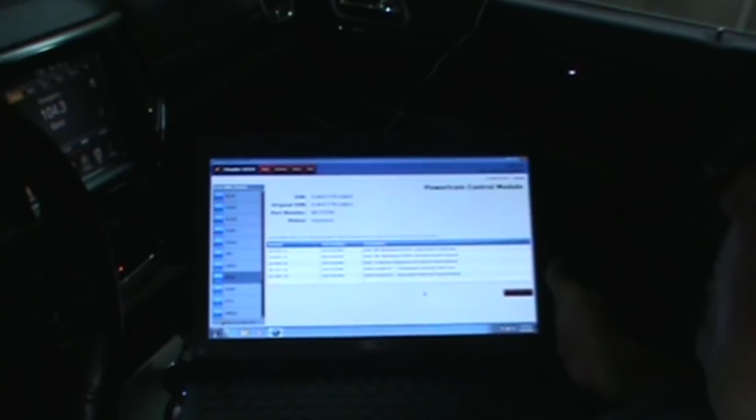Alright, so we didn't bring anybody along for the software install because that would have taken like 4 hours. Between the Java applet and the drivers and trying to find the J2534 software, which is deeply buried in a document, I went and installed the wrong software. It is what it is. I inadvertently installed the Tech Tools, which is not the tool we should be using. And ironically, I think if I had to find the software again, it may take me a minute. But we went into, let's see if the topology actually wakes back up again.

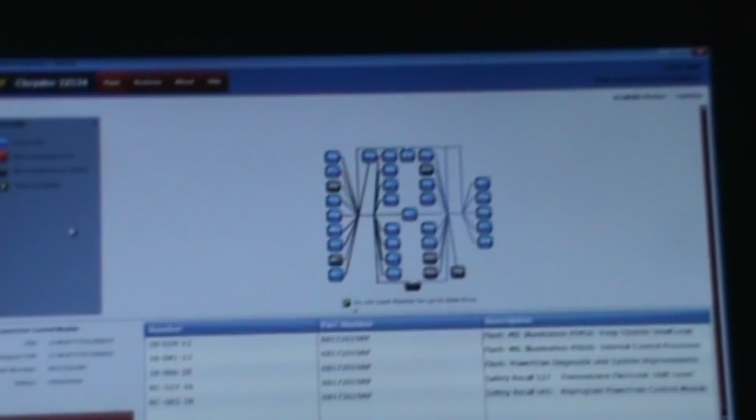No, it's not there. What's going on with my car? I was just going to go to bed and I look outside and I say, my car's not there. No, but we're doing a video on your car. Oh, you're doing a video on it? Yeah. Am I interrupting? Well no, you're in it now. Not like this. Alright, just leave the keys in the mailbox. Poor man's in his skivvies. Yeah. Just give the key to Maria. Alright. I'll see you later.

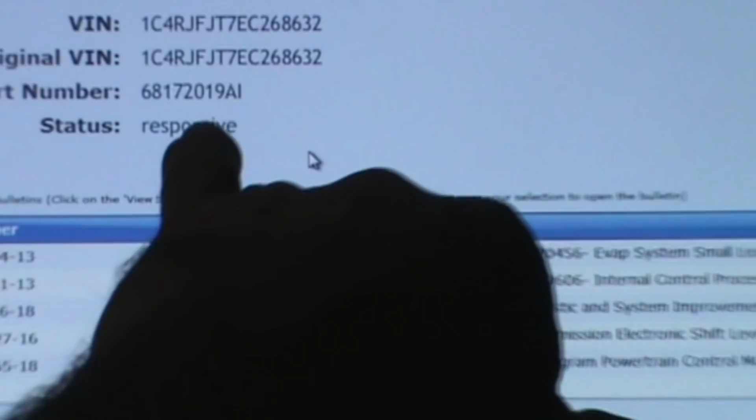Ironically, if we back out of topology, we just go to available flashes, we go into the PCM, it is listed, this is the one we want. The old number was AI, the new one's going to be AP, and that's our fix for the evap leak. And it inadvertently will fix a whole bunch of other issues. Looks like it'll even take care of recalls. I saw 2 recalls on there. We shut the radio off. We're going to shut the AC off. We shut the interior lights. We latched the door.

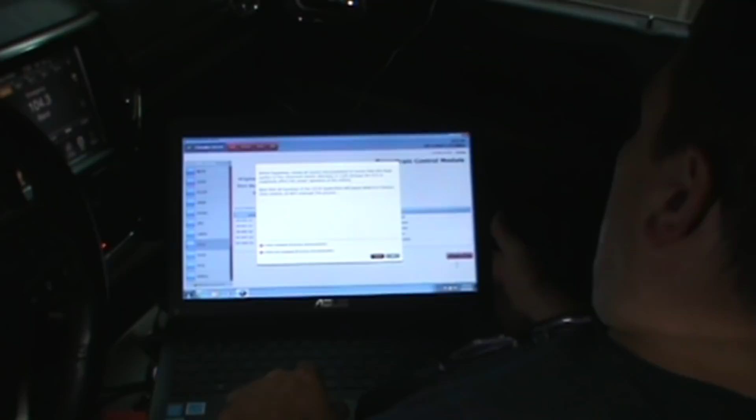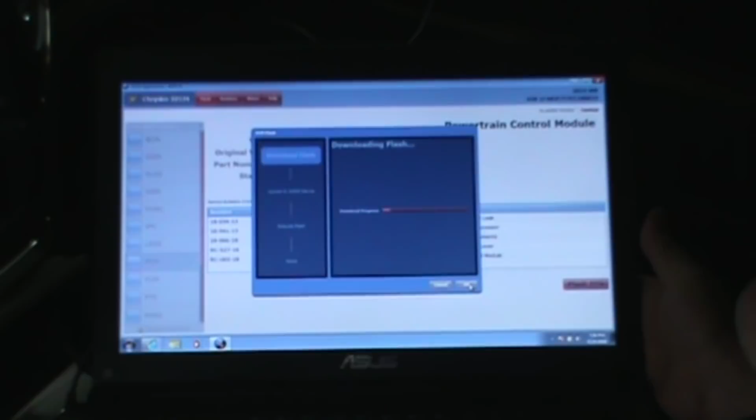I have reviewed. Yes, sure. You saw me. I read it all. You're a witness. I read everything. The whole thing. Now we hurry up and wait. That's it. This is where we do the speed through. It's interesting to me because it's such a different interface than what I'm used to. This is what us mere mortals have to go through.

Hey. Love you, man. I hope everybody's figured out who's behind the camera by now. Yeah, just some guy from New Level. Never heard of him before. I won't mention his name, Keith. I'm never too old to be the student. School's in session at 8 o'clock at night.

Just a quick footnote, and on that note, if somebody's willing to teach, don't be stupid, take it. Be humble. And if you have something to offer, offer it. Don't be stupid. That's right. I think Keith and I had a little discussion today about that. Yes, we did. And we may have a further conversation and include everybody in on it. Absolutely. There seems to be an industry-wide problem.

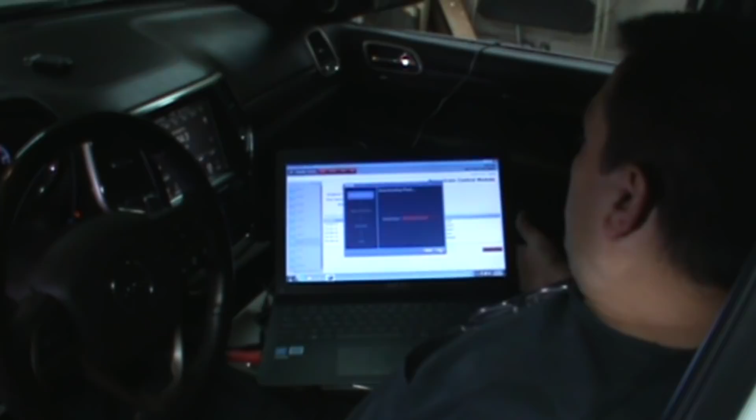Let's see how far we're progressing here.

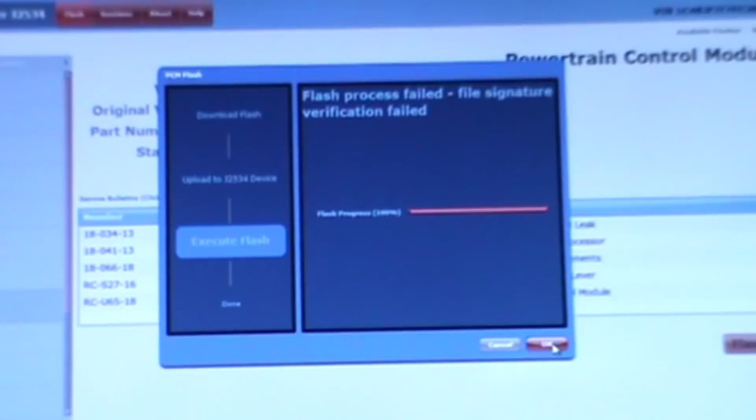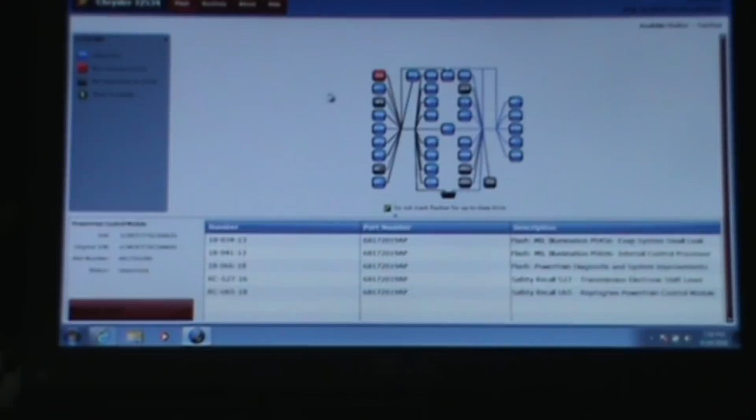Flash process failed. File signature verification failed. That's interesting. Okay. Go back out to your topology for a moment. Make sure that you can still communicate with the PCM and that didn't go red on you. ABS went red. Okay, let's go back into PCM. Verify that it still talks. Yeah, everybody's red. Everybody just went red. That's interesting.

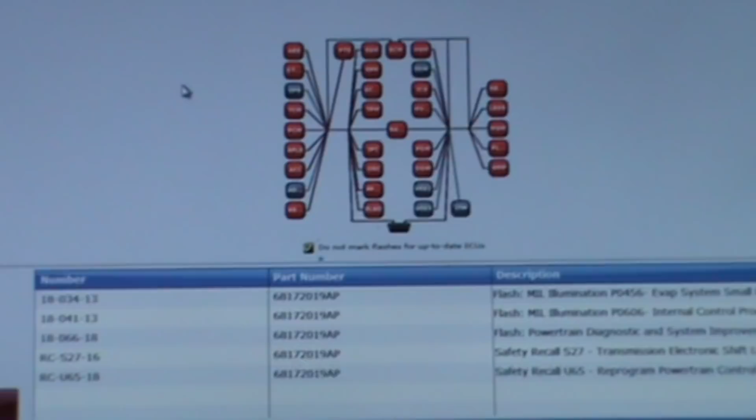Alright. Whatever you do though, we're not going to cycle the key off. No matter what anything on the screen tells you, that's the one rule. We never cycle the key. Should we restart the software? You can actually try going back out there and looking at, let's see, what do you have there? Up on the top. Routines. Go ahead, go into routines, and go into your PCM, and hit check PCM VIN. And let's see if it'll actually run that routine and speak to it.

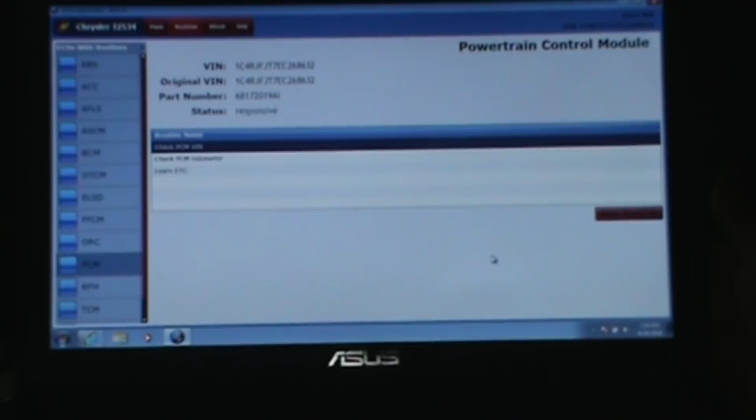Even though we see the VIN up there, we see a no response down here at the bottom. Okay. Alright, so this is the scary part. Because if it's not responding to that, then the question is, is it the tool, or is it that it stopped mid-programming and may have erased data and not put it back in? So we're going to unplug this scan tool for a second here. Should I restart the software? Plug it back in. Restart your software.

Excuse me. There you are. So that's part of the reason there. It looks like it may have dropped for a moment. I think our internet connection dropped. Yep. So possibly we want to tether this differently. Okay, so what we'll do is we're going to tether this over to mine. Just give us a minute. We'll be right back. Okay, let's start recording again, and we are going back in to give it a try on a different Wi-Fi.

Auto Intelligent Inc. Never heard of them. I thought we were using an Autel. Here come the jokes. Well, you know. I know.

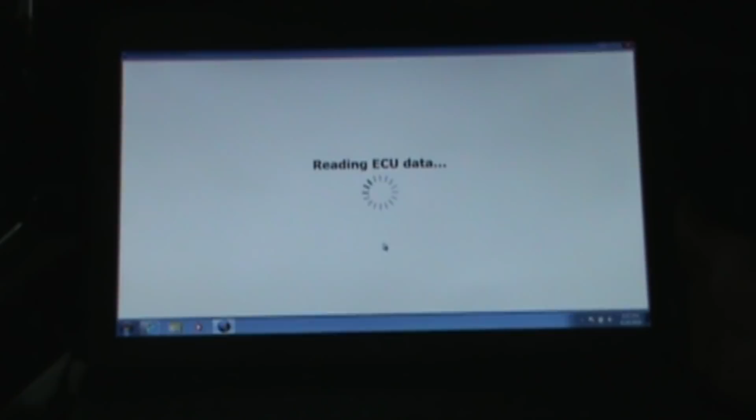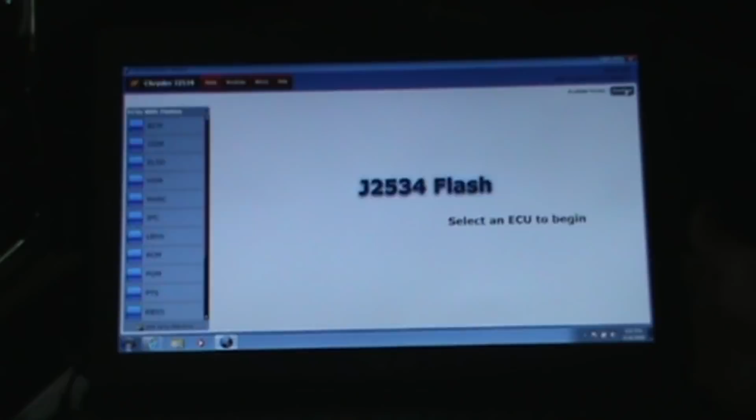I think that may also be why the topology stopped showing it. Okay, keep going, keep going. It's coming. That's a good sign. That's a very good sign. This PCM is showing there, so let's go back to the topology. Yeah. There we go. Now we're in, and we see little green lightning bolts everywhere. Right. But we're just going to work on the one that it's called for, because we don't want to create a problem. That's right. Click on the PCM. There you go. Let's try this again.

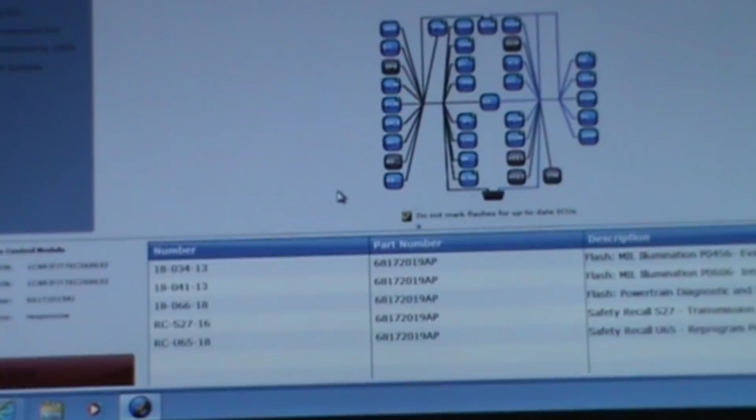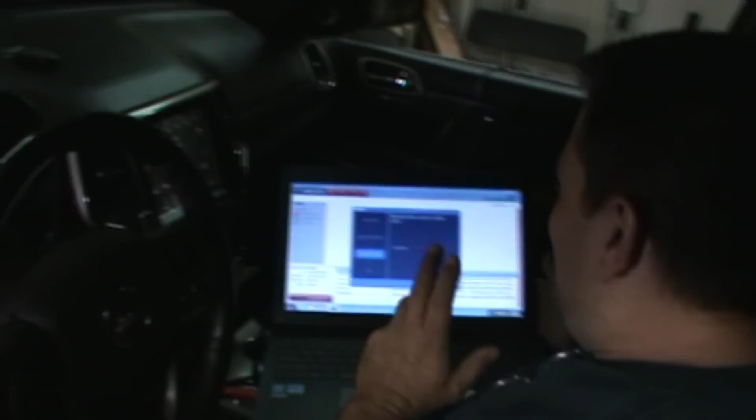I'm going to zoom that back a little bit. Yes, I read it. I read it again, just in case I missed anything. You know the part where it said make sure you have a stable internet connection? Hey, look how fast that downloaded. Amazing. There you go. That's what I was expecting to hear before, that fuel pump cycle. Starting Chrysler Flash, there's our ding.

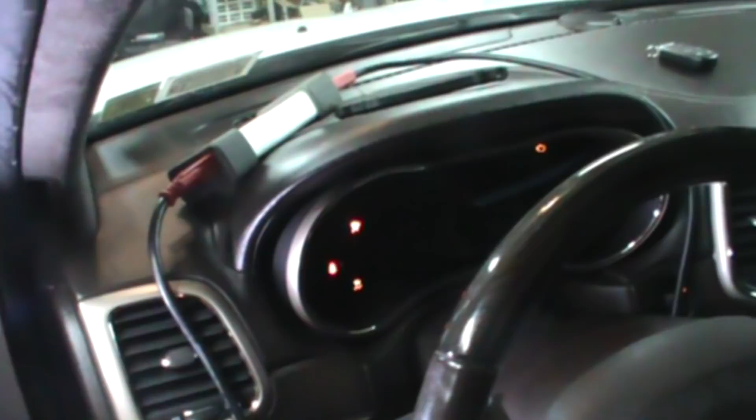Now sometimes when you're doing that, you look up there on the dash, everything will go black. Don't be scared, that's normal. They're just going into a mode where they want to turn off all the other accessories that are unnecessary for the moment. They want to eliminate those so there's no communication happening on that line other than what they're commanding. And the progress bar is moving, which is a great sign. And that is exactly why you do not cycle the key, because a lot of them can be recovered as long as you don't cycle the key.

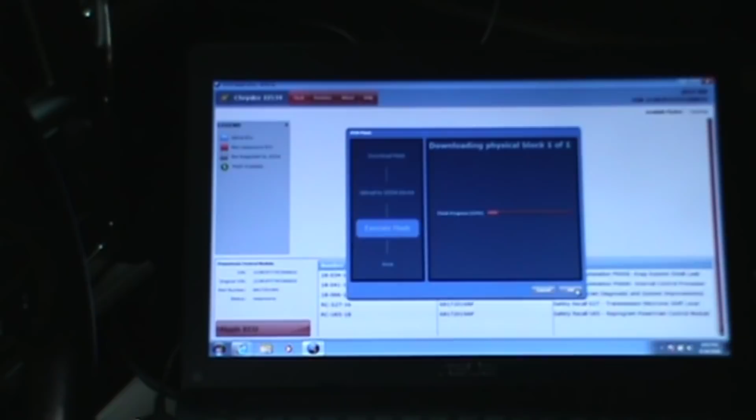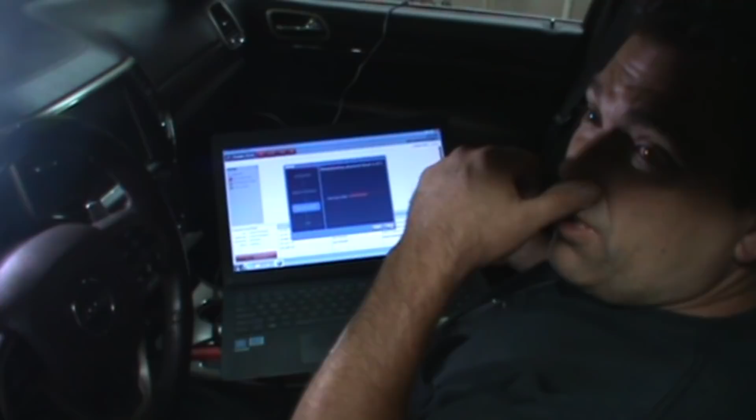Another hurdle when you go to activate your subscription. Right? I only have Internet Explorer on here, which is horrible. The only thing Internet Explorer is good for is downloading other browsers. But a lot of the other browsers don't work well with automotive software. So this is strictly my shop PC. I don't even have antivirus on here. I have nothing on here. I think Sam over at Tool Hut actually has a nice video on setting up a laptop, what to shut off, what to turn on. Yes, he does.

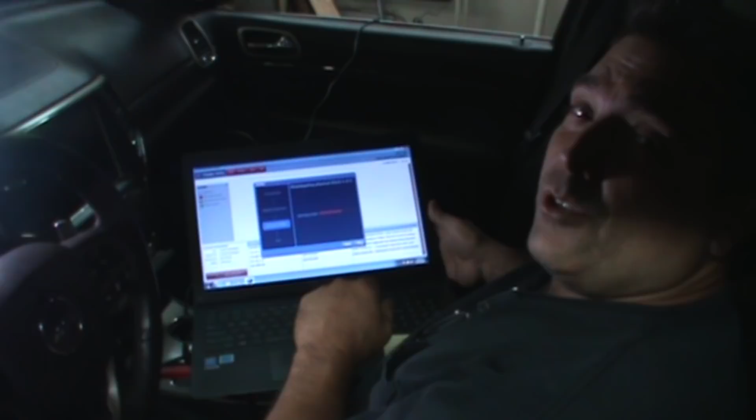The snafu was Internet Explorer. I go to Tech Authority, I go to activate my subscription, and it keeps coming up with an invalid security certificate. So I literally had to go to another machine, activate my subscription, come back in here, and then log in. And then of course it asks you for a token because it thinks you're hacking in from a different location. So then I had to go get a token emailed, copy it down, bring it back in here. So don't be surprised when you run into that. Yep.

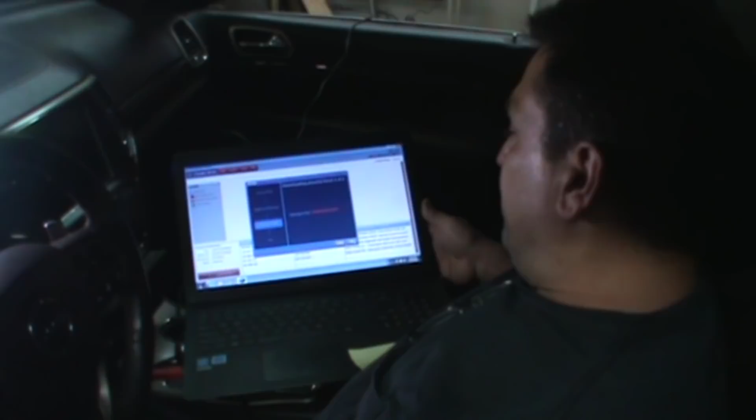Even with the wiTECH subscription, we still have to deal with the tokens. That was the first thing you asked me before. Is it a token issue? I didn't even get that far. I couldn't even pay for the subscription. The alternative is to get it through AE Tools and let them handle it. That's right. I'm not there yet. I'm getting there. Soon.

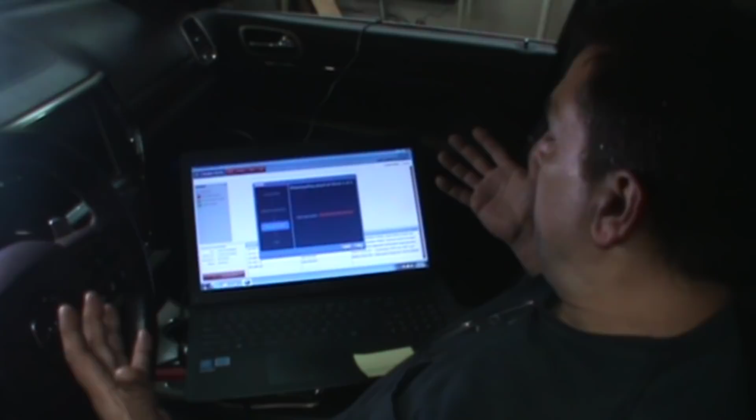Is this not the most boring process that you have to go through? Right. It's clean. It's clean work. It is clean work. It also gives you time to think about all those other cars, though, that you have waiting out there that need to get done. And it's definitely not too physical, which is good because, you know, I'm old and broken. But as you see, there's lots of hitches along the way. Not everything goes as predicted.

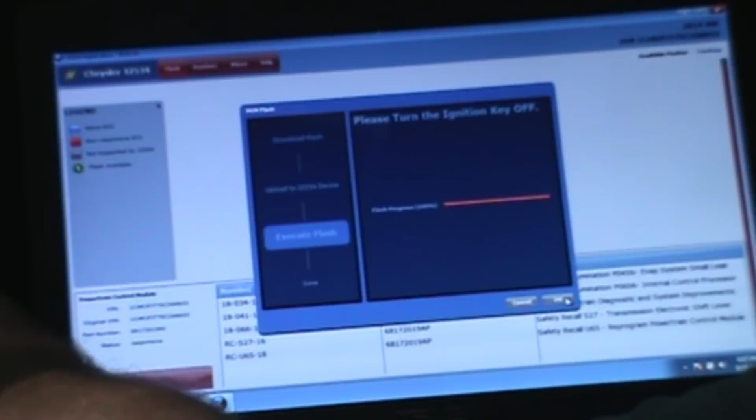Alright, so you got to turn your ignition key off. Now we can turn it off. And hit OK, and then it'll tell you when to turn it back on. I'll zoom in a little bit here on the screen. I'll shut the music off. I know my hearing's going, but there you go. I knew I heard music. And you have to hit OK. Flash process is successful. Done. Hit OK.

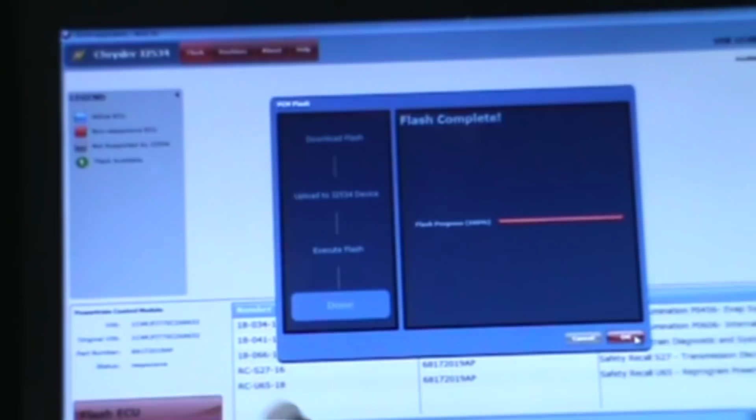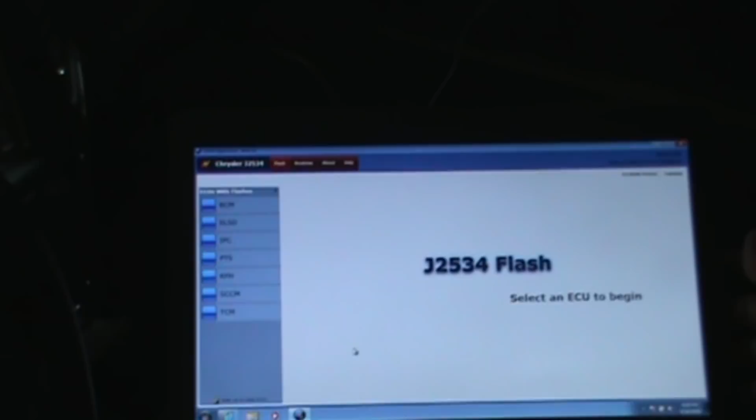Now, here's my suggestion to you. Go out of topology. Go back into your available flashes, up there on the top right hand corner. Top right. There you go. Available flashes. Let it sit there and populate again one more time just to see how many have gone away. And you see that TCM one over there? If you took note of what we had there when we were looking at the PCM, there was mention in there about transmission updates as well. But notice that the TCM is still there for a flash update.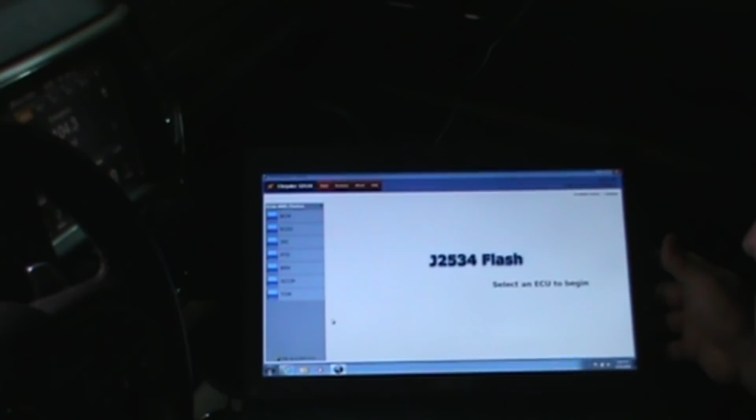Now, on wiTECH it would actually tell me, hey, bring this software up. J2534 is not doing that for you. So click on your TCM because you have those to finish. You're not just doing one module on this car, you're doing more than one. Now, is it recommended to do them all? Anytime you have things that go together like PCM and TCM, you're going to do those two together. In this case here it's an ECM, engine control module, not a powertrain control module. So your ECM and TCM, you always want to have those at the same software level.

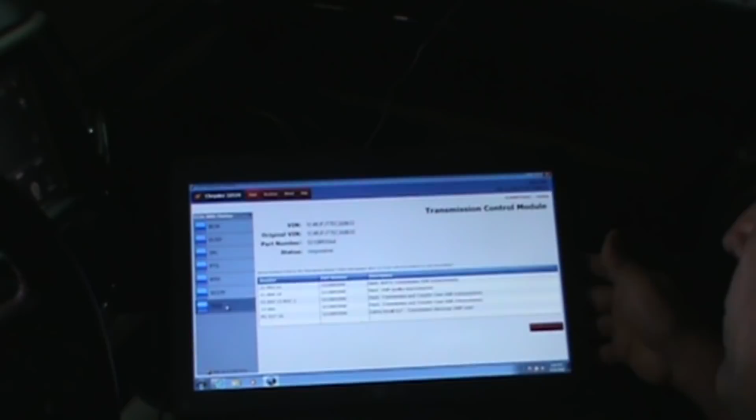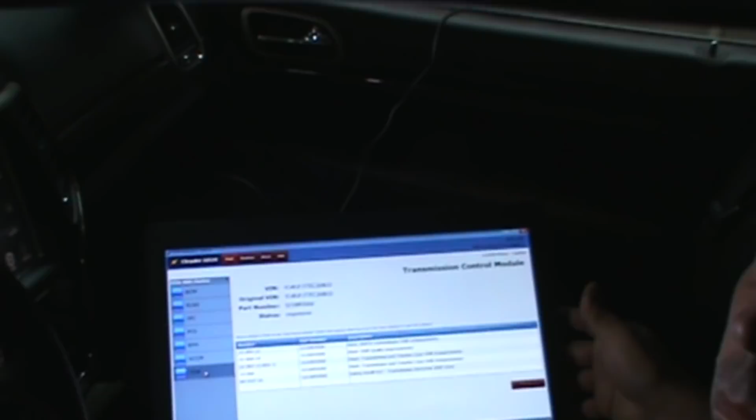If it was something like body control module and our cabin compartment node or our cluster for that matter, if they had a bulletin that was relative to one another. So you always read through what they're going to give you there, because if the BCM said, hey, we made improvements to instrument cluster updates, you're going to do two modules. Always look to see what they're actually doing to the best of what they give you, because they don't always tell you everything. But that way you know for sure that when you're done, everything is brought up to the software level to match the other module.

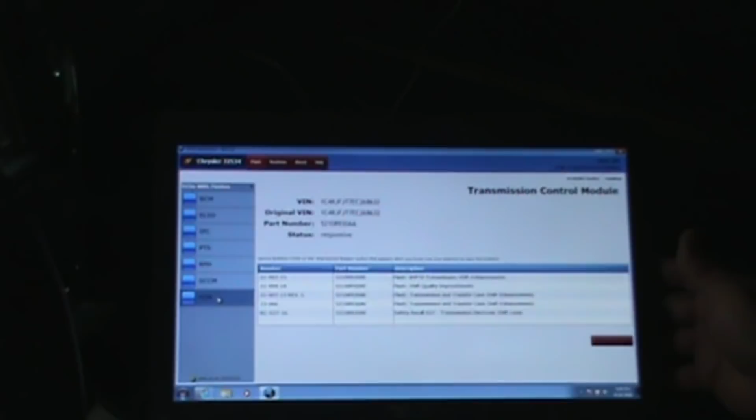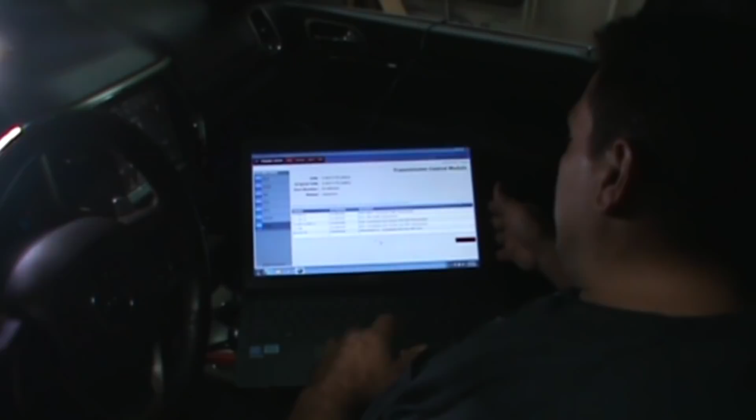Now, on the flip side, if you weren't here right now, I wouldn't know this. What are the consequences? You could end up with shifting issues, late shifting, things like that, depending upon what they're actually trying to accomplish. When we look at this here, we have a recall in there for transmission electric shift lever. If it went to the dealership, they would say, oh, somebody did half the recall but not the full recall, and that would come back on you as something they may not appreciate. And here's the funny part: this truck was at the dealer 2 months ago, and they said, no, there's no updates, everything's good. I sent this truck to the dealer for another issue, and they told me there's no updates. Yeah. But luckily the camera's pointed the other way, so you don't see my surprised face.

All right, here we go again. Yep. Did you read it this time? I did. All right. For those that don't know, he paused the camera and I read everything, and then he started recording again. And I'm a speed reader. And we're really, really good at video editing. One of these days I will edit a video. It's all the free time I have.

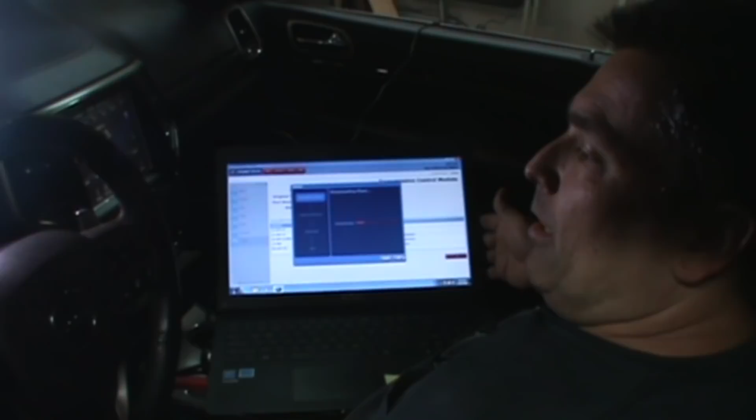So what other cars did you have cooking today? Transmission issue on that old Dodge van, service on a Volvo, air conditioning van for full service. That was it so far. That's still good work.

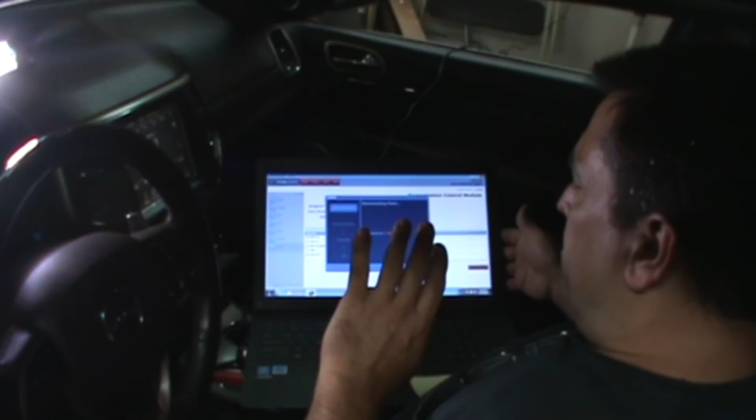Not everything can be this mundane. And this was one of those I specifically pushed to the end so I wouldn't be interrupted. The day's over and I could do this with limited interruptions. Smart idea. I actually tried to do this at least two other times and quit. I said, I'm not even going to get started. You always get a phone call, someone will stop by. As we were sitting here, the phone was ringing. I think I muted it. It's over here somewhere. Yep. I'm sure not quite as busy as your phone, but...

Pause this and come back when it gets closer. Alright, what do we got there? We got lights, dashes going out, radio went out, things coming back on. Things are happening. It's like a holiday celebration.

I'm being very careful. Name that movie reference in the comments.

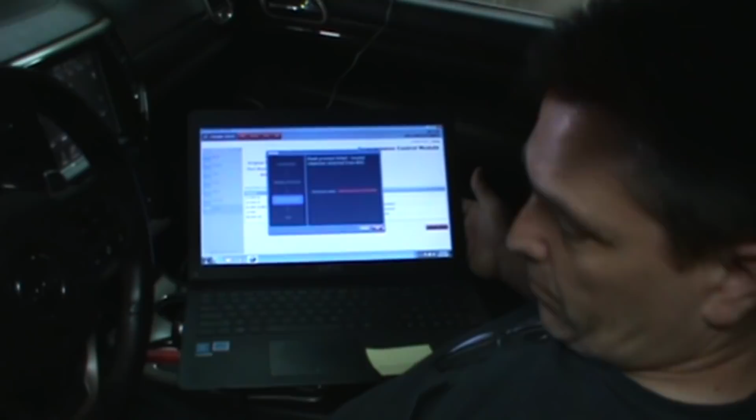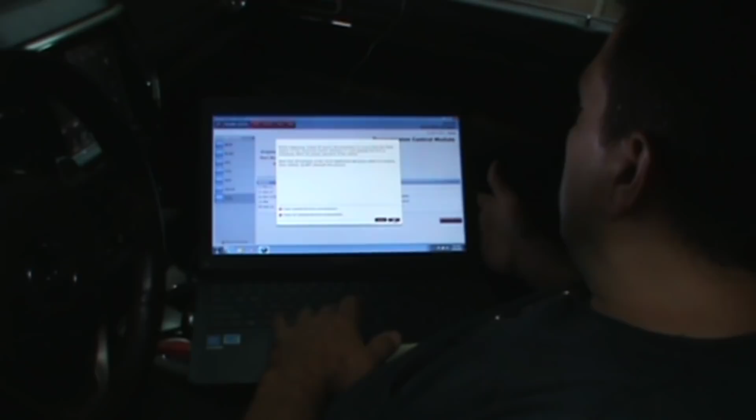Again, I have read all of the documentation. Which is why there were no failures. Starting flash engine, please wait. Excuse me. What's on this? There's much on there.

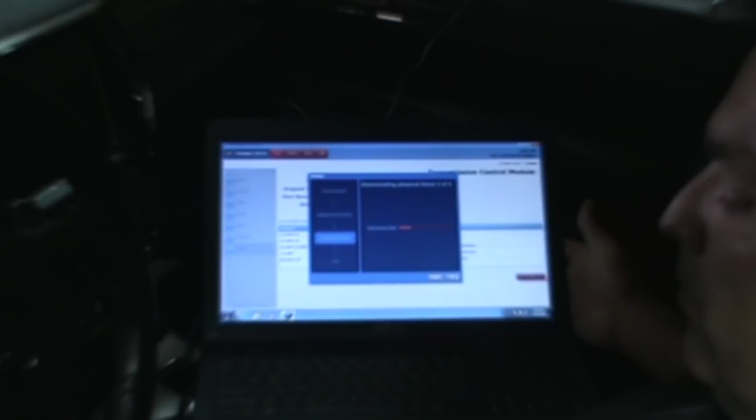You got my good angle, right? It doesn't make me look fat. No, not at all. No, yeah, I think you're okay. Fat. Hold on, right? Is that better? Yeah, that's it. Flex it. Wait, hold on. Wait. So macho. Yeah. That's it. Hey, come on now. This isn't a Danner video. That's right, Paul. I said it. Oh, no. We have a love-hate relationship. He hates to love me.

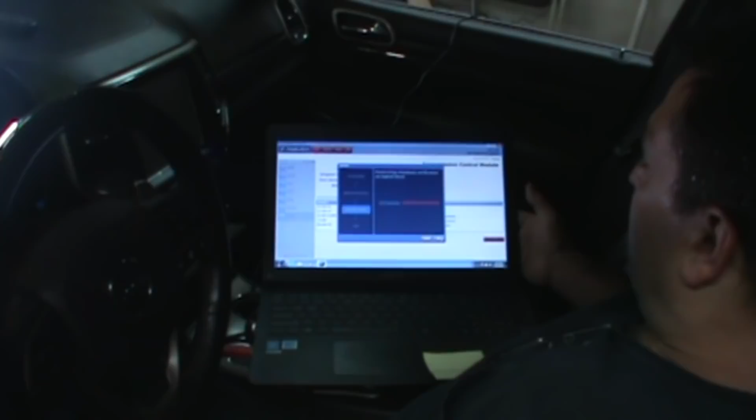Come on now. Get in there. It's like watching grass grow. It really is. And you literally can't do anything else. Nope. You can't walk away. Nope. Because if it tells you to press a button, you have to be there to press that button. And if you wait too long, that's not a good thing. Look at that. Flash process successful. I blame Autel. Hit OK. Eric, I know you got my back on this. I'm sorry. Actually, this is auto-intelligent. That was my mistake. All right.

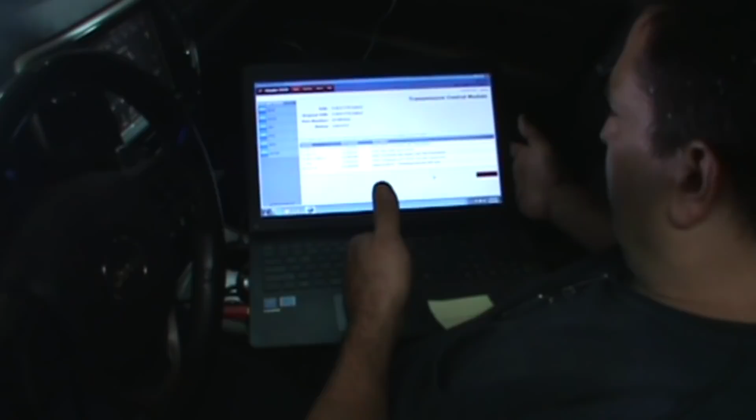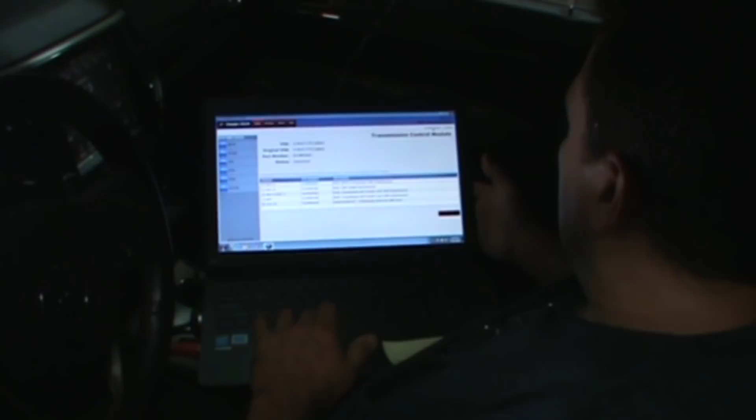So now you got your original VIN back in there. Remember what I said before. Same thing. Go right up here to your topology or go up to your available flashes. And funny, oh wait, that's your newest part number. The AE now. It's already been updated. And that's for the transmission. I was expecting to see the AP. Nope. So let's go back to available flashes. Yep. Which you're already in. So go to topology and then click back into available flashes so it re-updates. Yeah, no worries. Go back into available flashes. Okay, so TCM's no longer there.

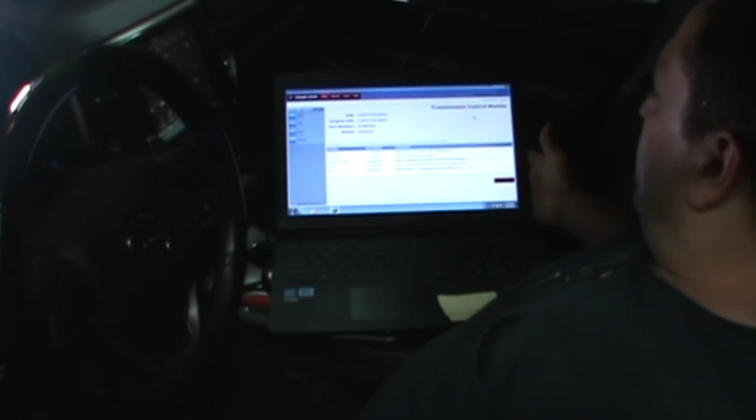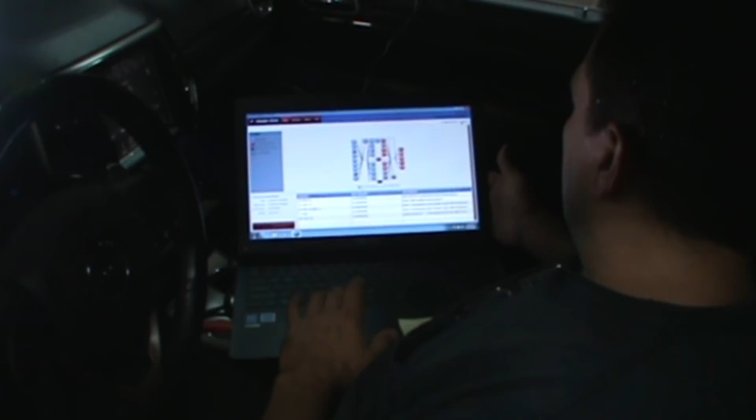Now you can cycle your key off. And wait about, let's say, 15 seconds or so. And then you cycle your key back on. And now when you go back into the topology, everybody should be green again. Theoretically, if everything was good. What do we got going on there? What does that say? Radio in the center? Hover above that center one right there. Radio. Which we know is actually active.

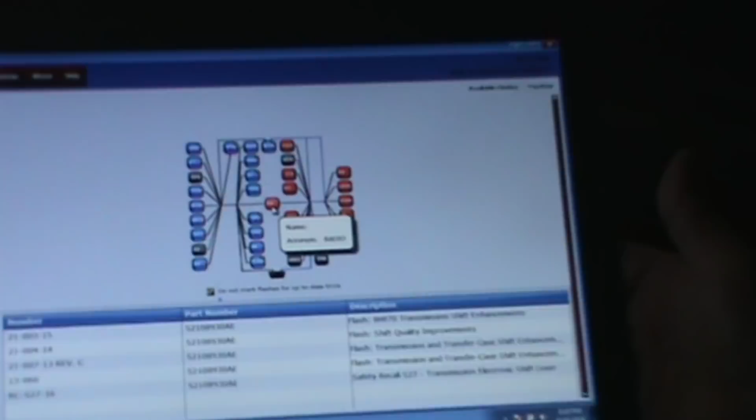Alright, close out of your 2534 for a moment. Go back in there again. Aha. You dropped that on my Wi-Fi, I believe. Luckily, I think we dropped out of it after the flash. Yes, we did.

If it continues to drop, make sure your Wi-Fi is not set up to go into battery saving mode or anything like that. Some wireless cards will do that, and that'll kill you. Also, if you can, stay plugged in.

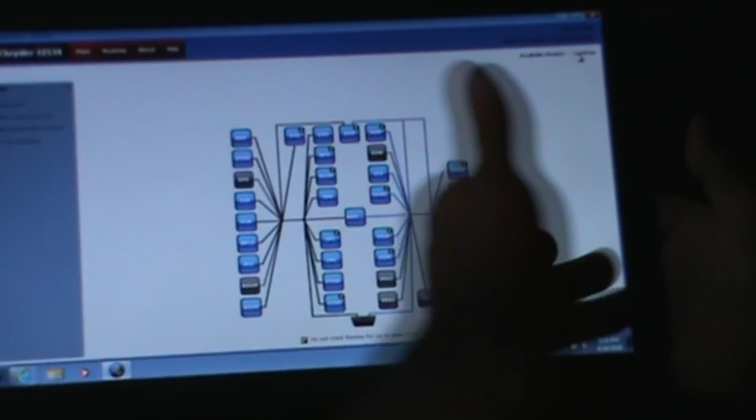Here comes all those modules. Looks like a fully populated list again. Go back into topology, and like magic, everybody's back. PCM and TCM, I'll zoom that in. No more little green lightning bolts. There are other modules there that have updates.

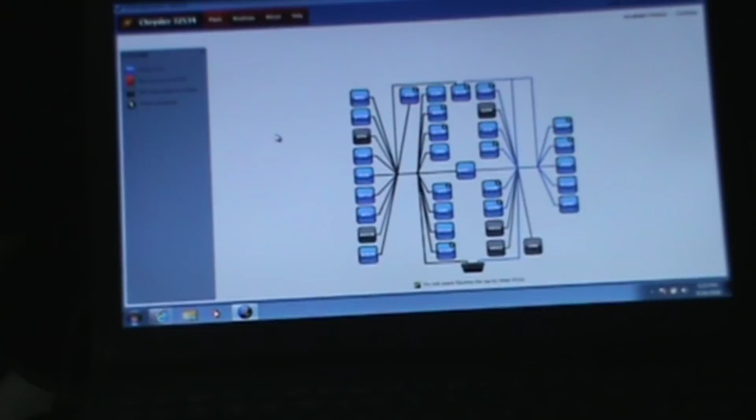You only touch those updates if they make sense, or if it's relative to a problem you're actually trying to solve. So I always just give them a once over most of the time. I'll go around each one of the modules there. If it has anything to do with ECM, TCM, that's what I'll do. But I can tell you now, from doing so many of these, you have nothing else there. It's just ECM and TCM on this one.

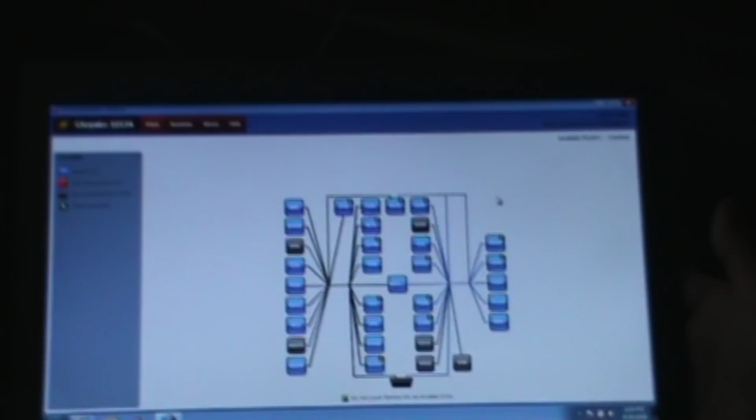That's it? That's it, bud. Hey, look at that, it even starts. Now we gotta clear the check engine light.

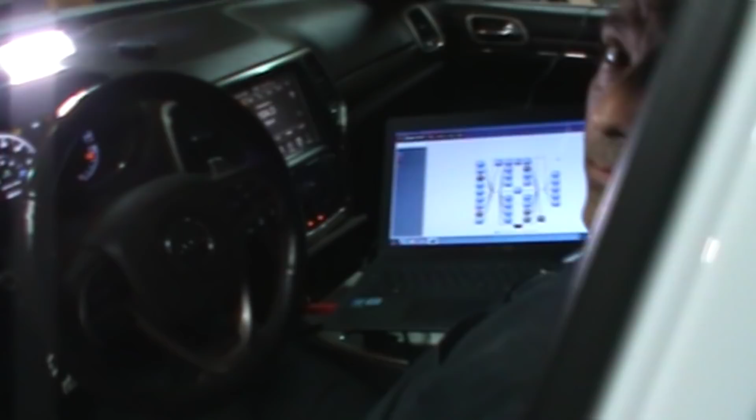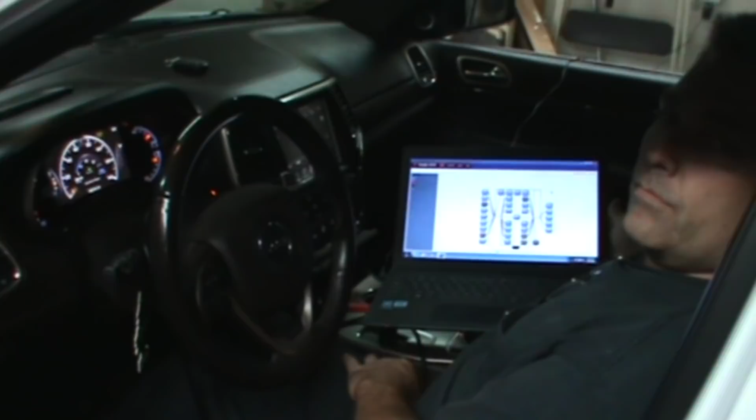Actually, you don't. You should not have to clear the check engine light. If you have a check engine light on, which you might have here, if I get that light out of the way, the next part of this is sometimes you end up having to learn the electronic throttle control. So you may have a code for that, because when you did the ECM programming, you actually got rid of any codes that would have been there. You wiped it clean and gave it a fresh new copy. Sometimes you'll have to learn the electronic throttle control.

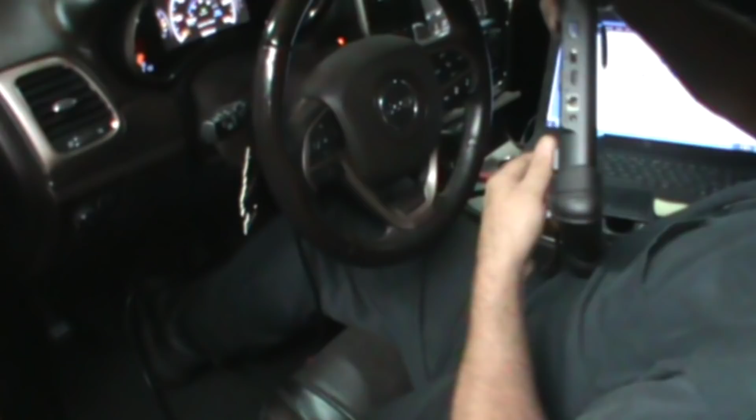You have any hand sanitizer? No. I say it jokingly, of course. A tool is a tool.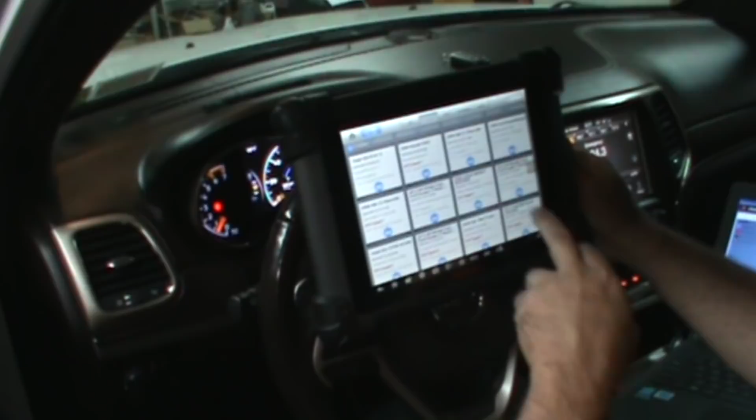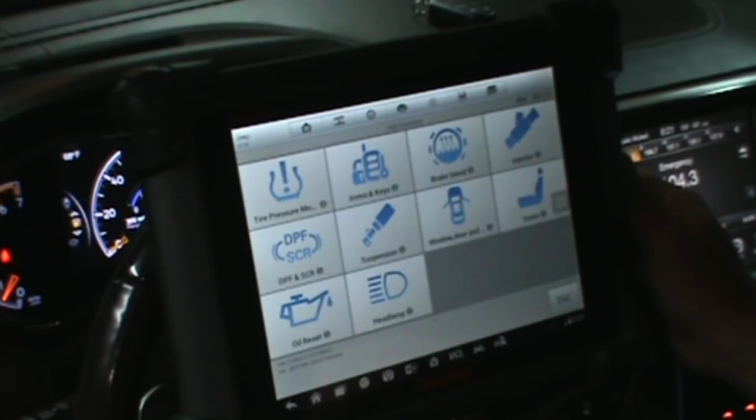It may still have that PO. No, it shouldn't have the P0456. No, it shouldn't.

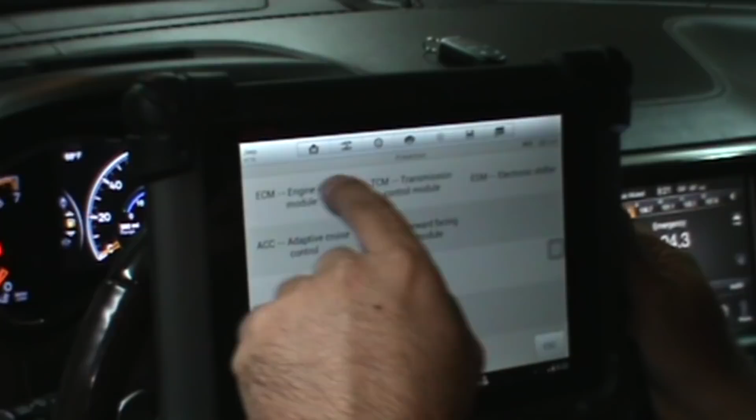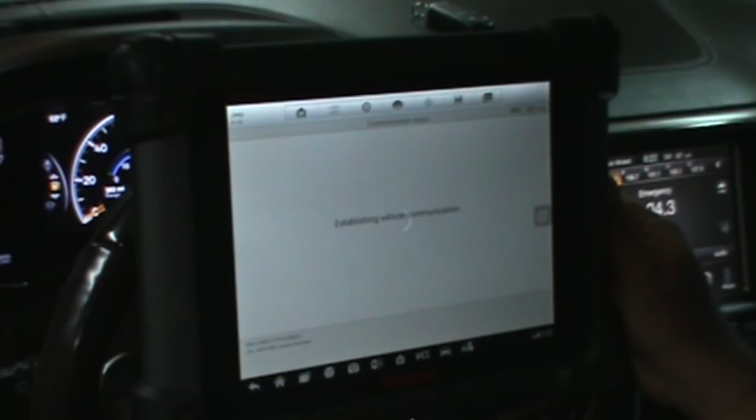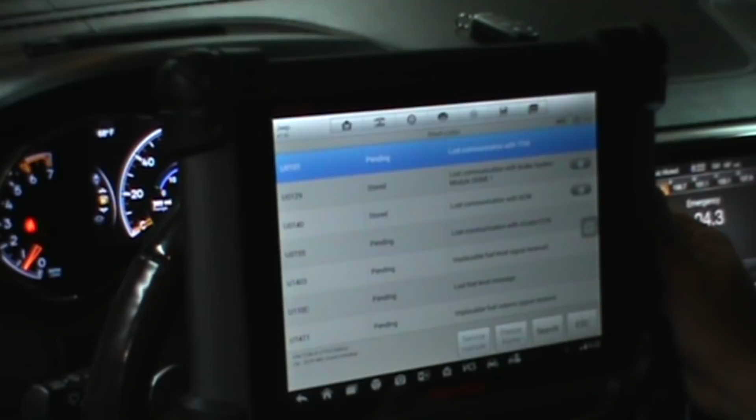So it said some communication codes were in there. All U codes. All U codes. So yeah, you can't clear them unless you go key on, engine off on that one. And that may have been because of the drop out there while you were doing the TCM.

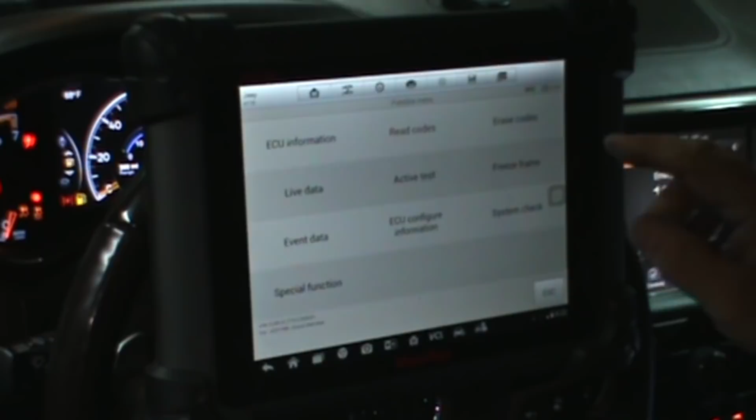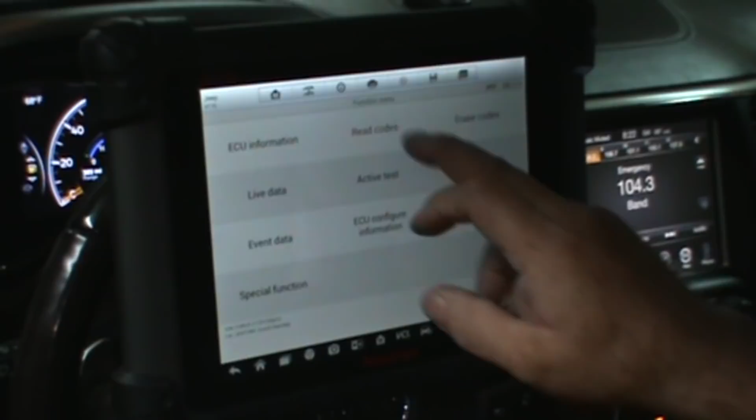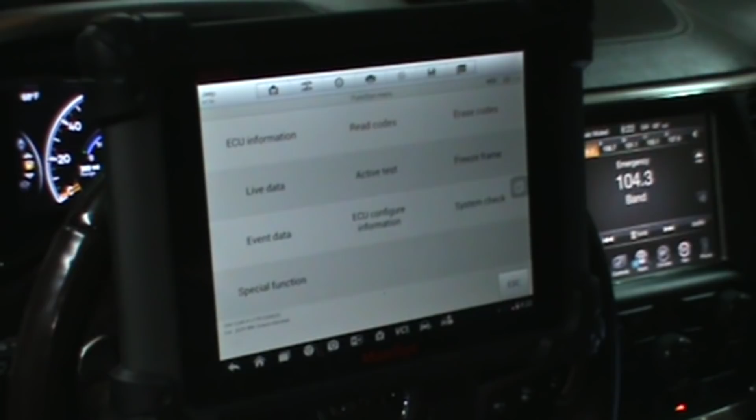There you go. Okay, just when you start it up again, make sure you have throttle response. Lights out. Give it a little tap on the throttle, make sure you're good there. And that's it, bud. You got throttle response. You don't have to do the ETC control on this one.

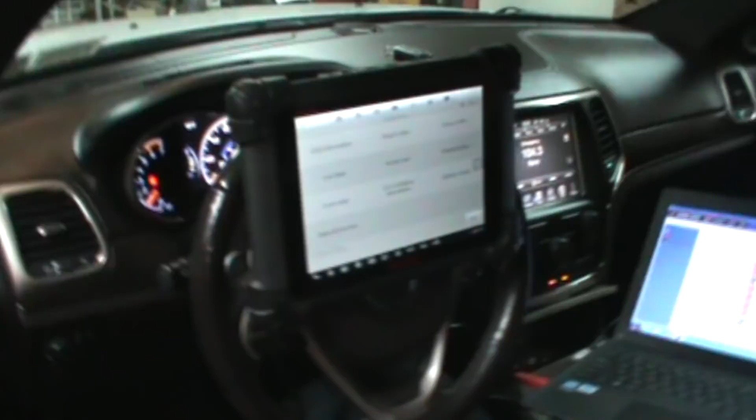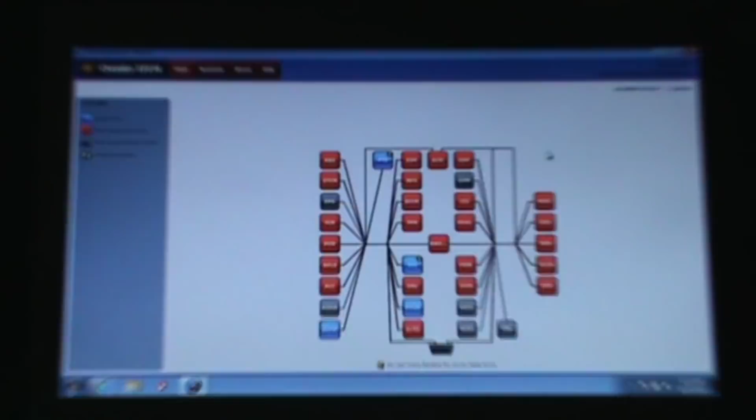By the way, look at how many modules we're talking to now. None. Disconnected, but we're talking to modules. So every time we shut the key off or disconnect it, we're gonna have to manually shut the program down and reinitiate it so it can connect again.

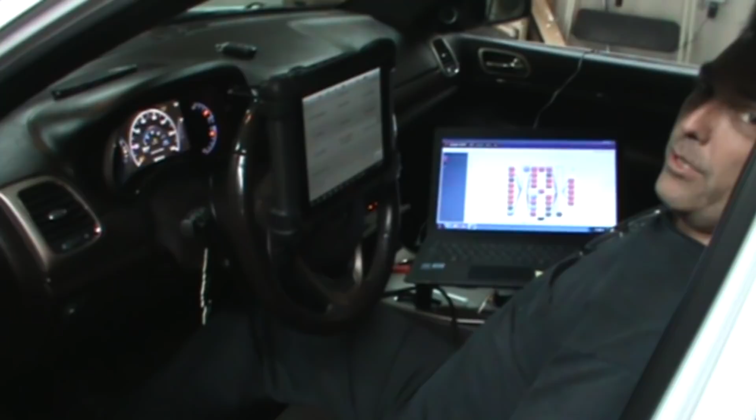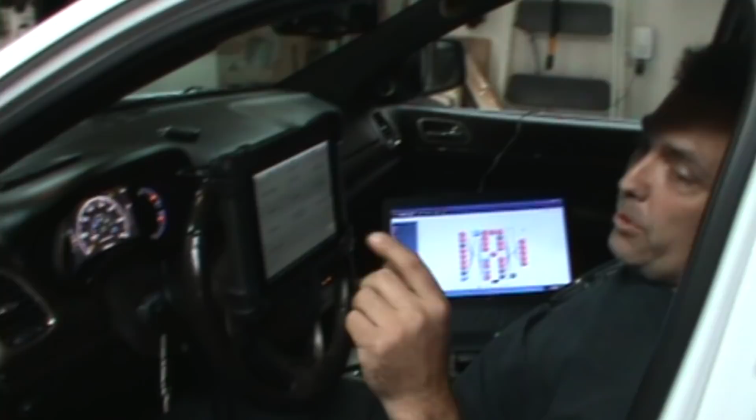And then if we actually did a new module, we'd also have to do not only the throttle, but the wireless. Help me here, why am I drawing a blank? Yeah, well, if we had to, we'd also have to do the WCM replacement, the PCM replacement procedure. Wireless control module. Yep, I had it. I was there, I knew you were there. I knew what you were going for. I just wanted to see if it would catch up.

Hey, it's late, it's late. Your hours are like my hours, and probably even then some. And I have to be at my other job in 3.5 hours. Yeah, and I have about that long to shower, eat, and sleep. So yep, it's all good though.

I only have about 4 or 5 left, and then I'm done. And the only thing we have to do, which I'm not going to get to do, I'll let the customer do it, is actually drive it and reset all the monitors to make sure we're 100%. That's it.